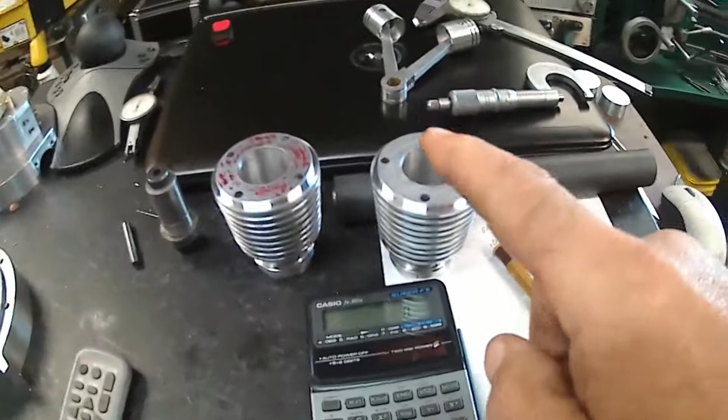So anyway, I'm going to go to the surface plate here. I went ahead and measured the bores, and they're pretty close to the same, both of them. 1 inch and 11 thou, about 11 and a half. So I'm just going to go with 11 thou, 1 inch and 11 thou.

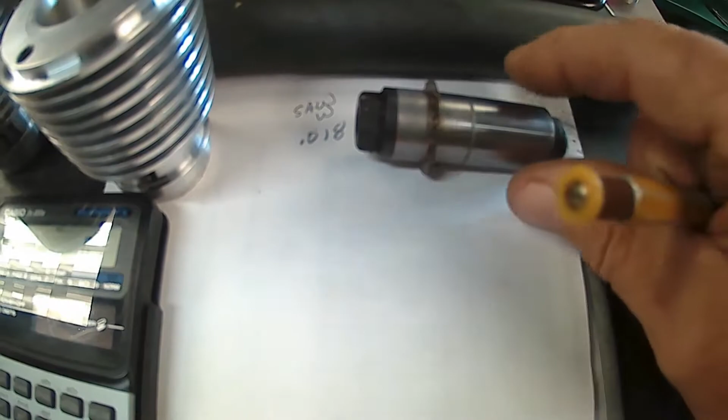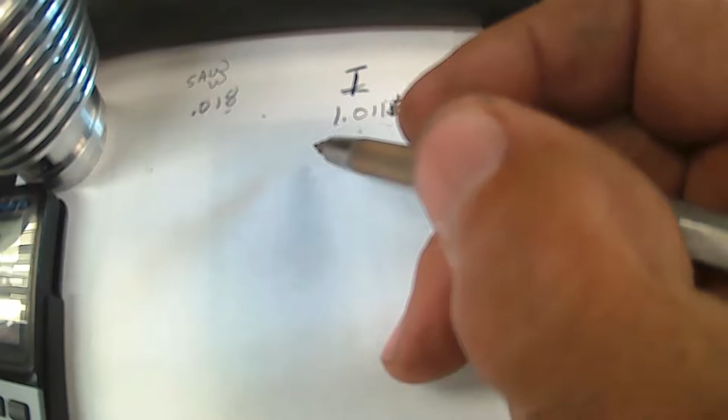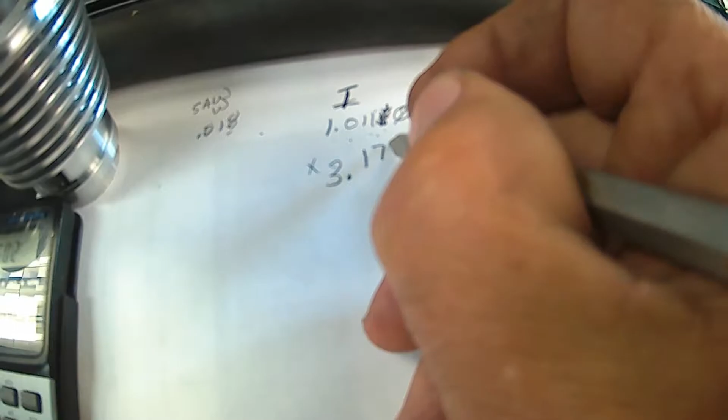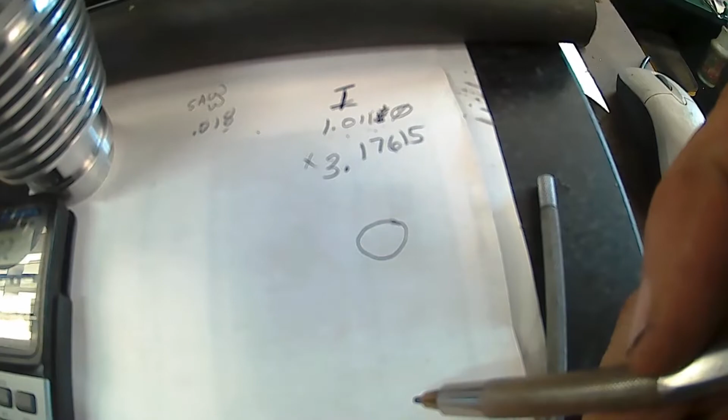My slitting saw width is 18 thousandths, that's 18 thou thick. So what I need to do is take this number, the ID of the cylinder, times pi. So we'll take 1 inch, 11 thousandths, times pi equals 3.17615, and that's as far as I'm going to carry it out. So that's the length of the circumference around that diameter.

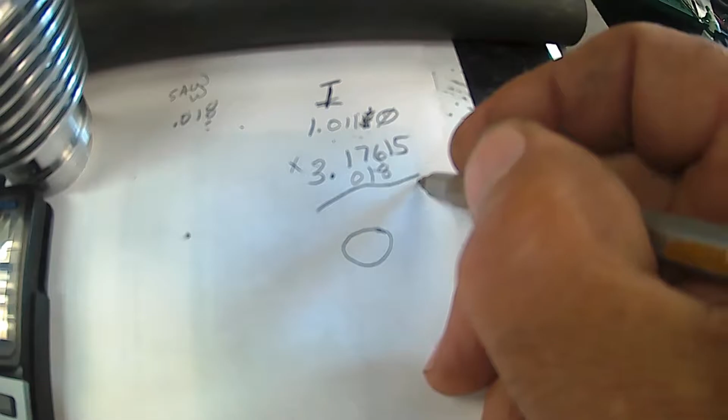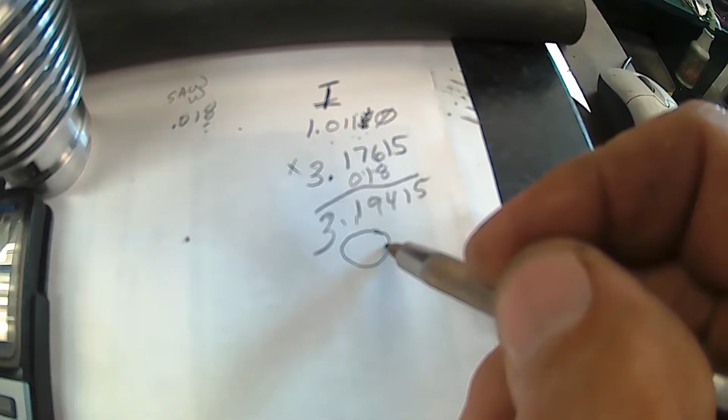Now I want to add 18 thousandths because I'm going to cut that with a slitting saw. So I add to this length 18 thousandths. I get 3.19415. So now my circumference with that 18 thou added to it is that number right there.

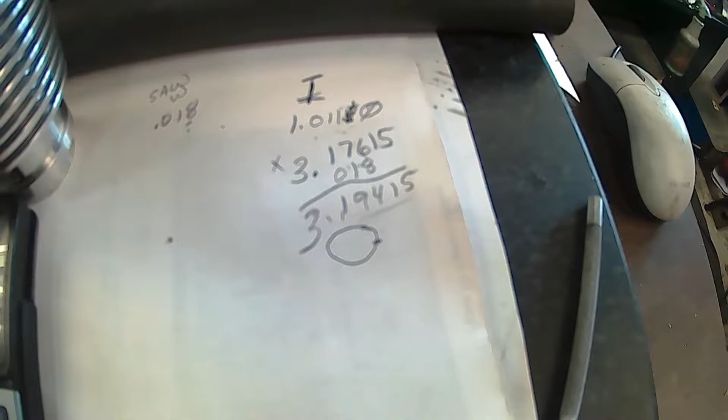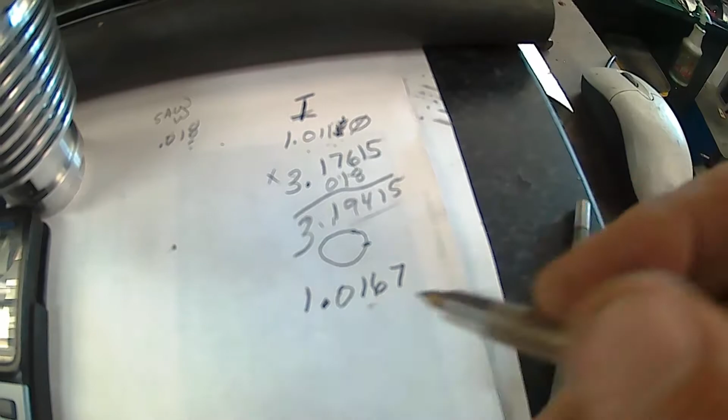So I take that number, 3.19415, divided by pi equals, this is the diameter I want to go for, 1 inch, 16.7. So that's the OD of what we want for our ring. This is the OD diameter.

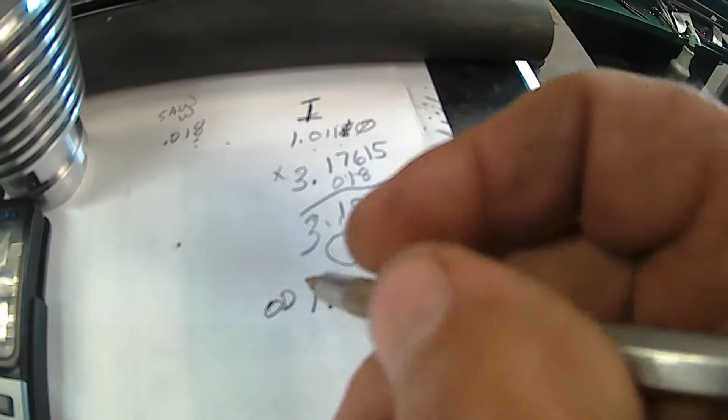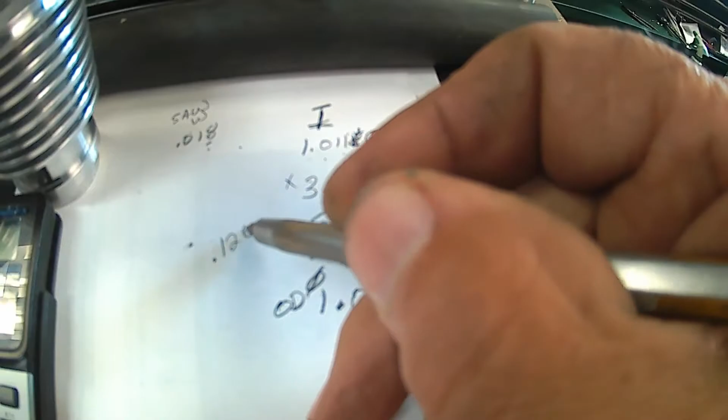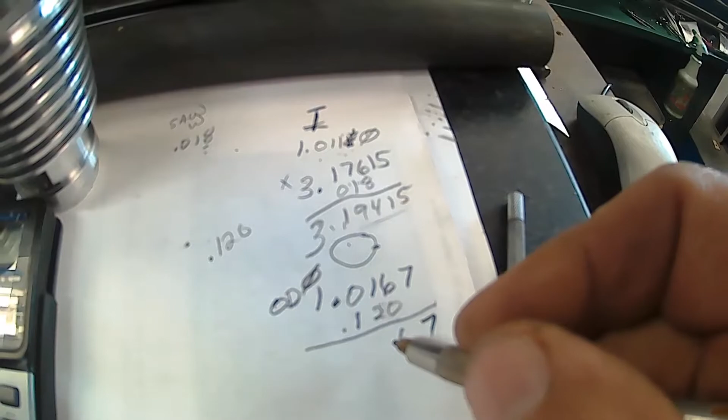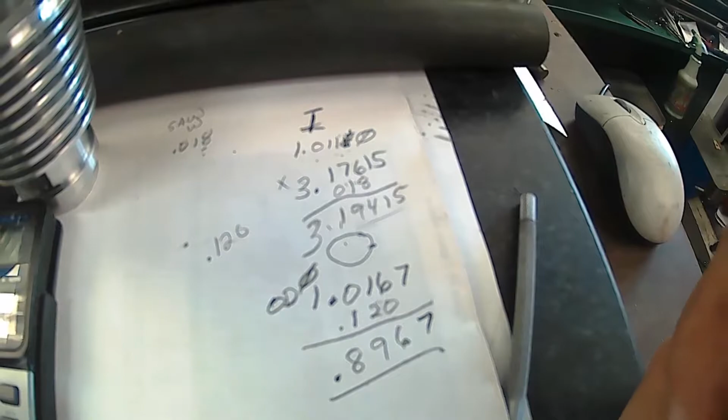Now for the inside diameter, I want to have about a 60 thou wide ring, so basically that's 120. All you need to do is subtract your ring width from that. So that is what we want to shoot for, 896 thousandths. Did that right? Yep. So this is the ID.

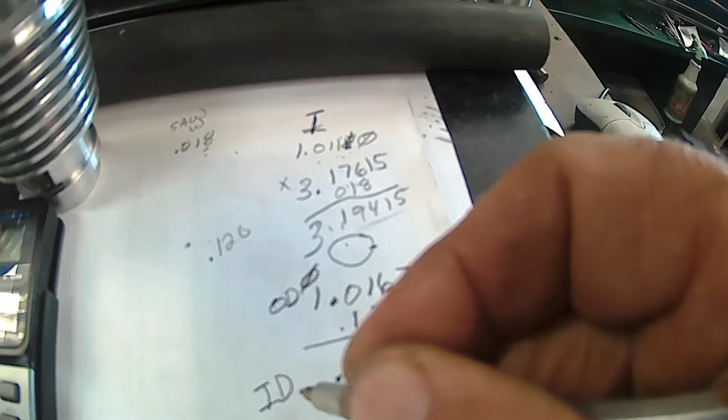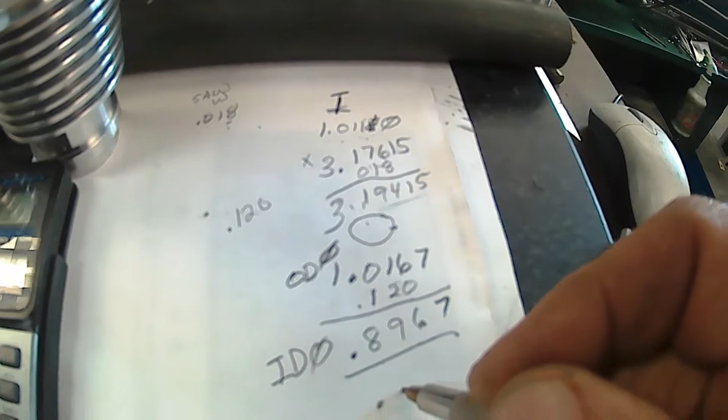And then the thickness of the rings, the finished thickness is going to be 0.60, actually 0.60 pushing 0.61. That'll give me about 1.5 thou of clearance on the side. So that'd be the width. So those are the numbers I want to go to.

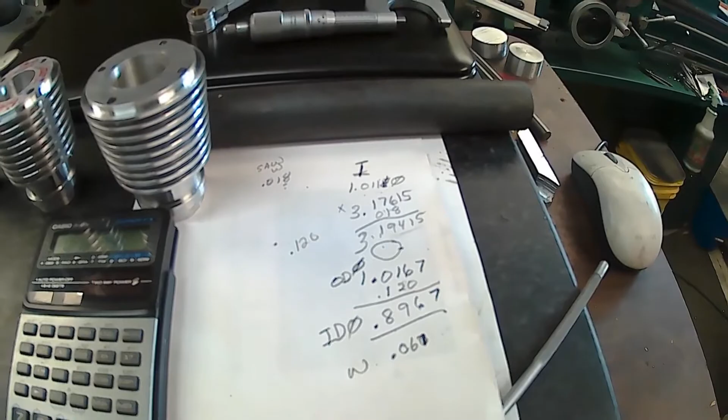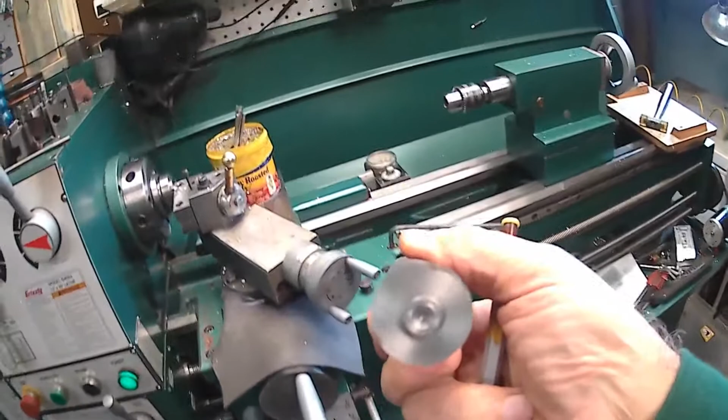So I'm going to go over the lathe and put the 3-jaw on. I've got the cast iron right here, this is nodular iron, cast iron. What it is, the grains are spherical instead of flakes, and it's a little tougher material. I'm not sure what it's called, but the difference between the two is one is flakes, the granules are flaky, and the other is nodular, more spherical, more round, the granules. But anyway, I ordered cast iron material special for rings, I think 3 or 4 different sizes that I have. But anyway, it won't fit in any collets that I have, so I got to put a 3-jaw on.

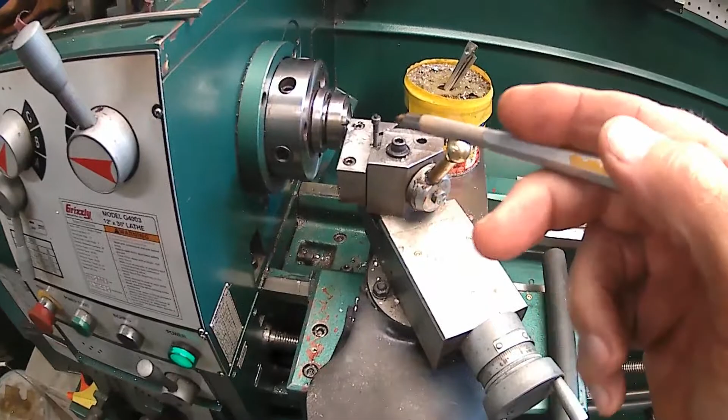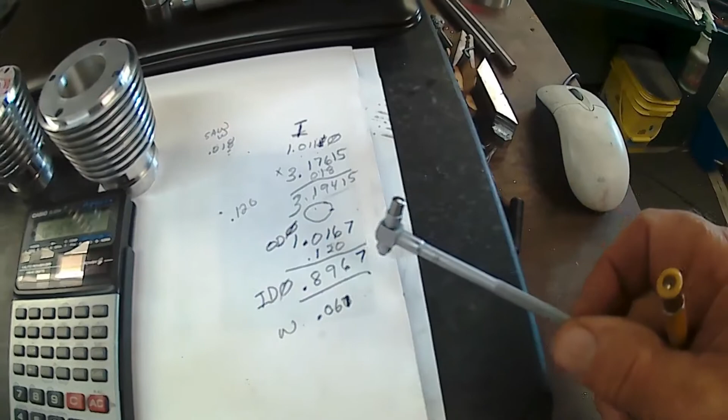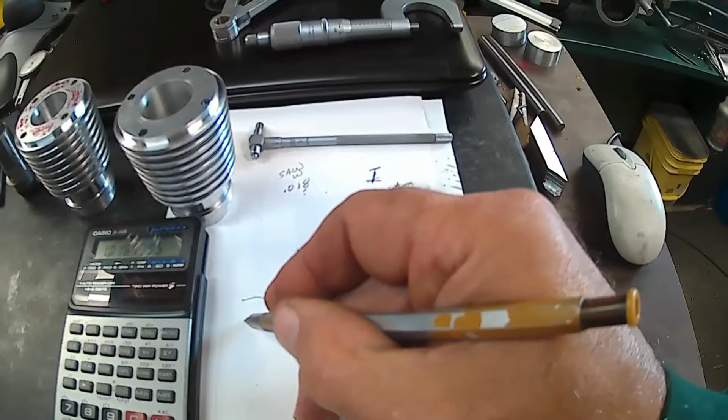So I'm going to go ahead and put the 3-jaw on and start turning up those diameters we just figured out here. I'm going to turn the OD, turn the ID, and then I'm going to try facing them off at that width, try to hit that width. And once I get the rings turned, basically all it's going to be doing is basic turning. Once I get them turned, we'll go over to the mill and take a vise, clamp them in the vise like that, and then we'll go through with the slitting saw and cut them.

I know a lot of people just break them. You wouldn't have to figure these numbers out then, but I've done it this way so many times and it's worked flawlessly for me every time. So I'm just going to continue doing it that way.

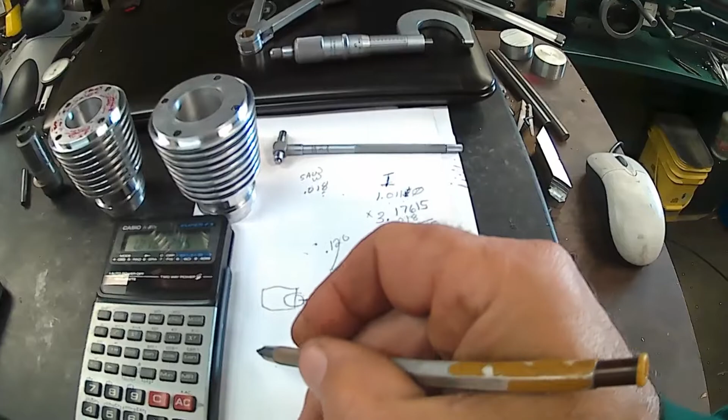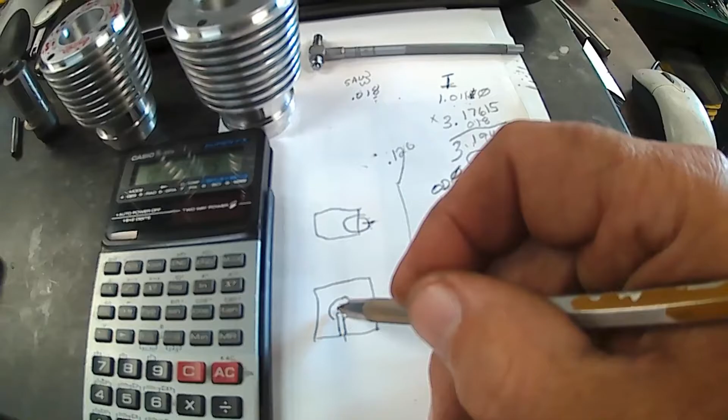And as far as heat treating, what I do is I take a flat plate or piece of sheet metal, tin, whatever, and I'll put the ring up against it with probably about a 120 thickness, expanding the ring apart. And that's standing up. And then I take and dim the lights because that helps.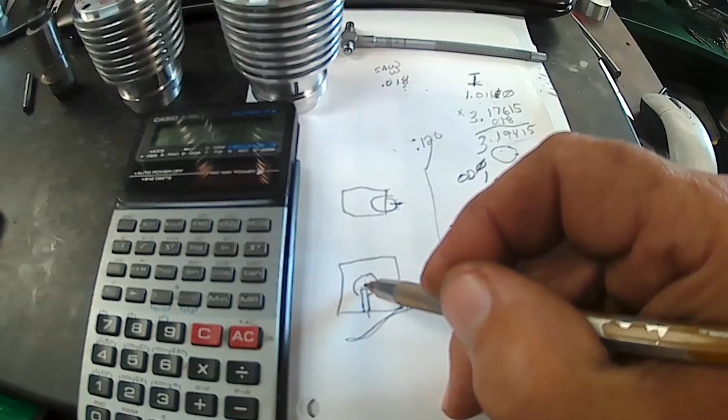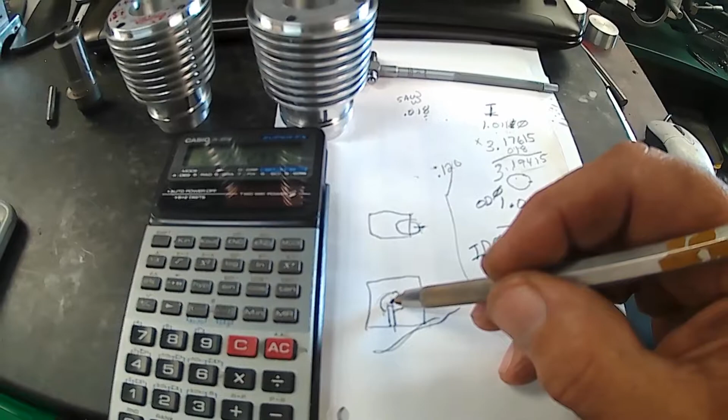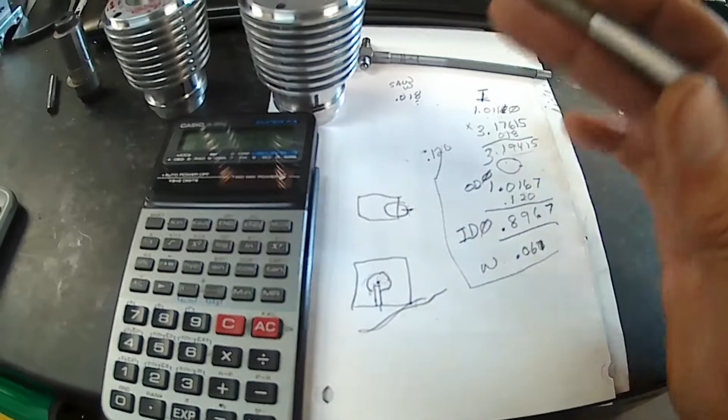And I get a propane torch and I try to aim for the middle with the torch, and I start a distance out, and then I come in and get closer, and that pushes the flame out. And once this starts to glow, if you see it's getting hotter on one side or the other, just move away from it. And once it gets like a cherry red, I just take the torch away and let it sit there and cool. Cool slow. And once it's cooled slow, you'll see there's no more grip on that, the gap is widened out now.

And then after that, we'll have to put them in the cylinder and size the gap. So I'm going to go ahead and turn them up. So when I get them turned up and parted off, I'll be back.

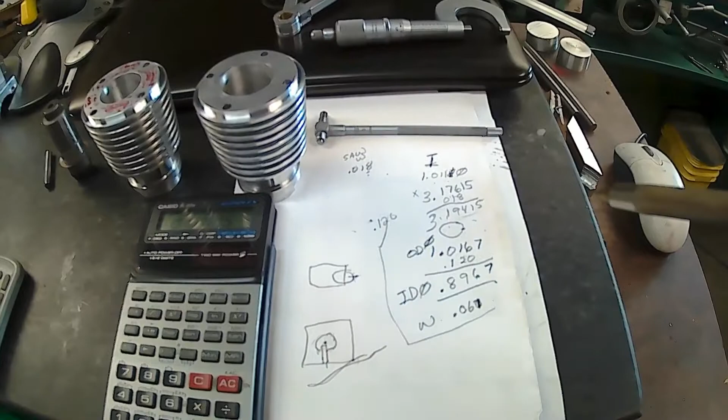Okay, I got the rings cut out and turned the OD, turned the ID, and then parted them off. I parted them off just a little bit wider than I wanted, so that I could come over and break the edges.

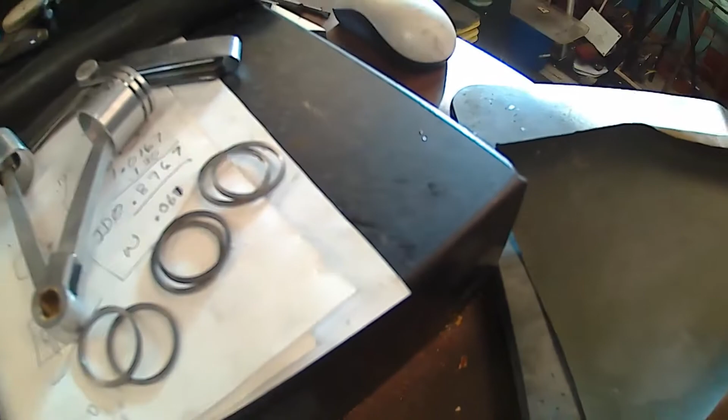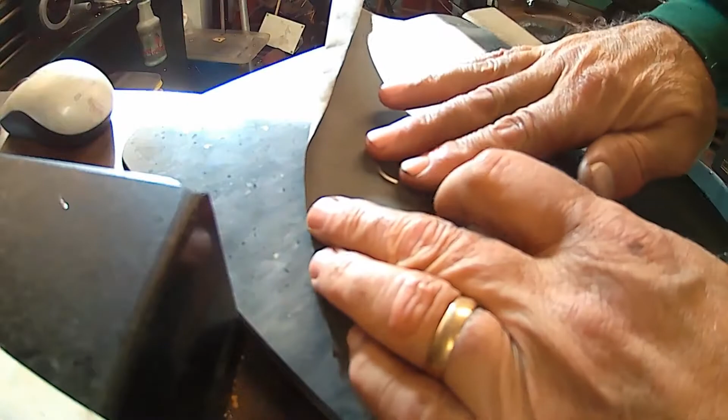I've got some wet dry paper, 600 grit is what it is. What I'm going to do is set it down here, set your camera down here, and just go on each side to clean it up.

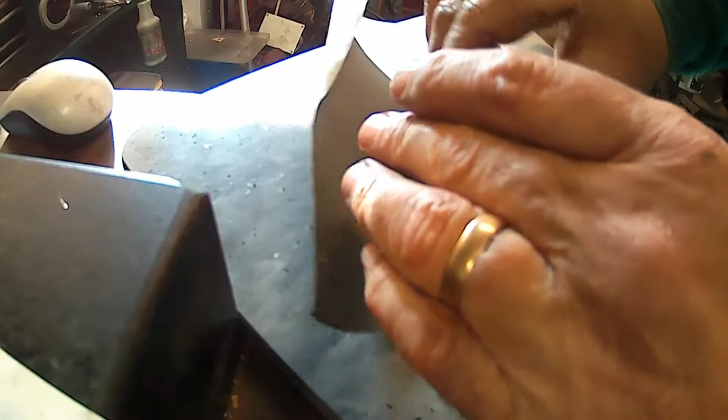That looks good. It doesn't take much. And then check - oh yeah, it fits in there nice now. It was a little tight to start with.

But I'm going to go through all of them and do the same thing. You can see when they clean up all the way around, if you look at it, they get nice and shiny.

I say it don't take much. That one just about. There we go. Anyway, I'm going to go ahead and do all of them that way.

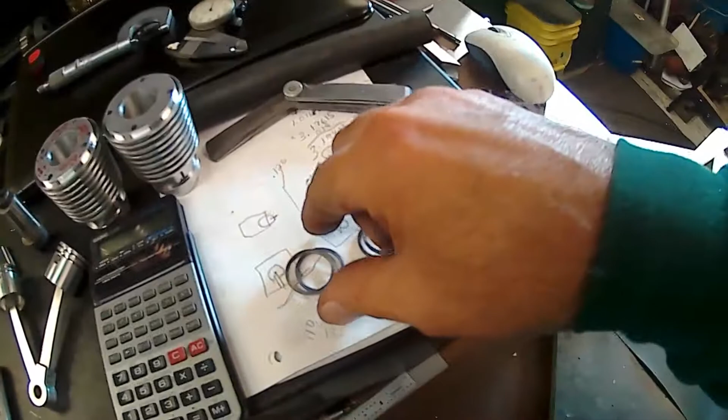I ended up with 2, 4 - that's one set - and 2, and almost another set. One shy of another set, but that's because I just finished out what I had turned. So, if I don't break any, hopefully knock on wood, I'll have 3 extras here.

What I'll do is I won't heat treat them, I'll just put a tape on them with what diameter cylinder they were for, because I could actually use this on even a smaller cylinder down to a 1-inch and probably get by with it. So I could use them for another motor or something. But if not, I'll hang on to them.

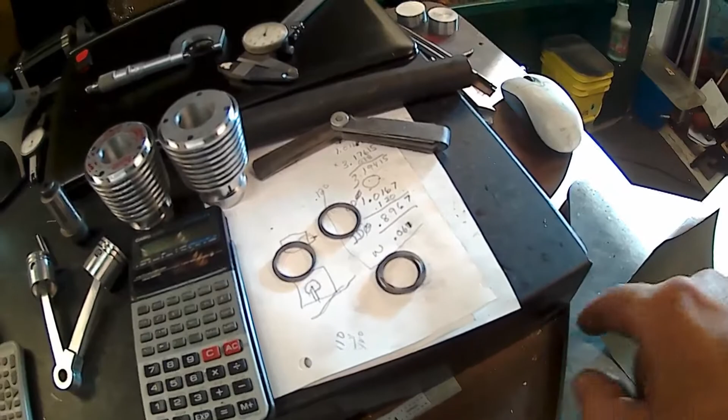But anyway, I'm going to go and finish doing that on the paper, and then we're going to go over and I'm going to put a little slitting saw in the spindle in the mill, and we're going to run through and slit these.

Like I say, it's nothing spectacular. I just clamp them in the vise like that. Just beep, beep, run through.

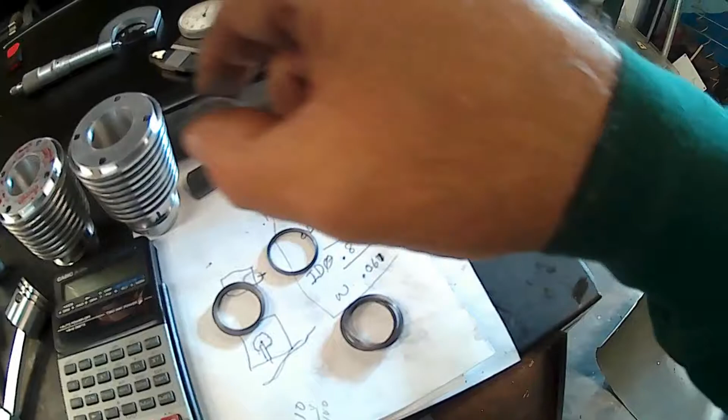It doesn't - theoretically you'd like to have the slit on center line, but if it's off, it really doesn't matter a whole lot. You're going to come back and put the ring in and then gap the ring with a file anyway. So I don't know - I just kind of eyeball it to center, and I don't dial them in or anything. I just eyeball it to about approximate center and run it through.

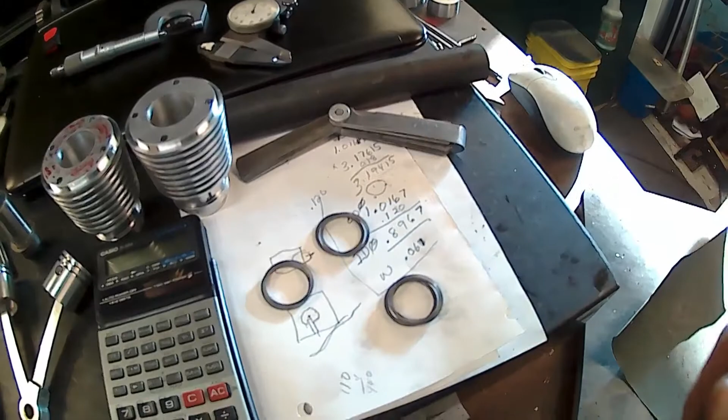So anyway, until then, I'm going to go ahead with the paper and clean them up, and then we'll move over to the mill the next time I start videoing again. Catch you later.

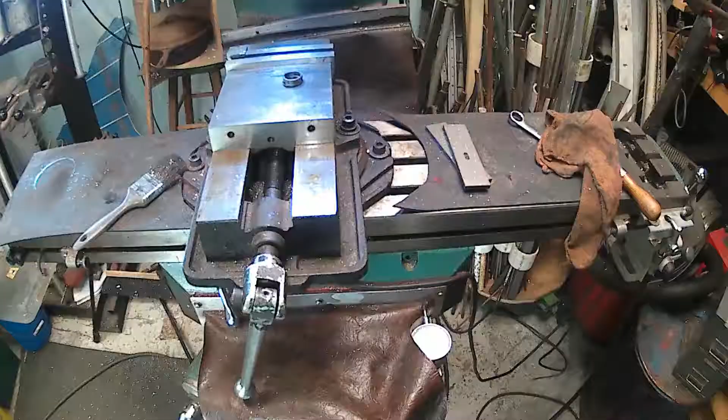Okay, I'm going over to the mill here, and we're going to clamp them in the vise. So what I'm going to do is...

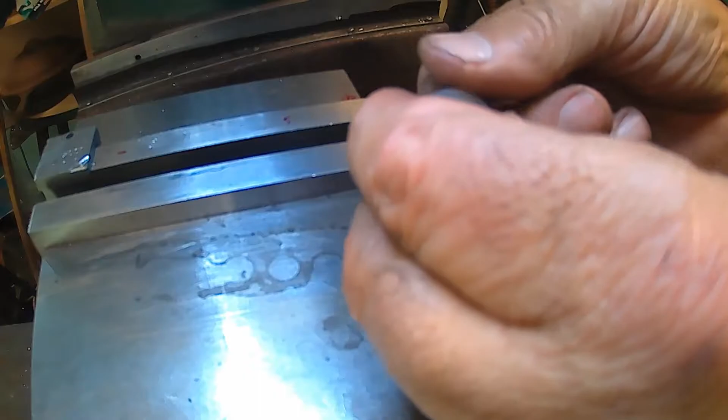Take a small drill, just take a small drill. This is what I do when I have a whole bunch of them - put them all on the small drill, put them in the side in the vise. I got them all on a small drill, and I just kind of hold the drill parallel up with the table, and then push and hold them up against the drill, then tighten it up. Now they're all pretty close to the same height.

Like I say, I don't worry about them getting cut right on center line. Now we can move over here and put the cutter in.

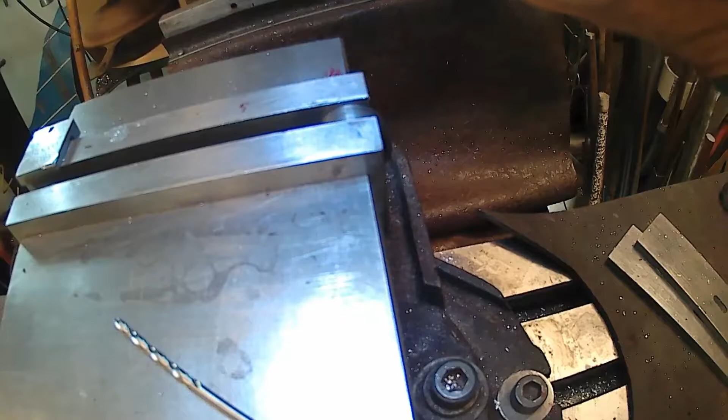I believe it's a 3/4 shank. Take the collet out and get the right collet. Check to make sure. Yep, that in... that in. Snug it up.

And then bring it down. I'll crank the table up, crank the knee up. I'm going to move you to the magnet and see if I can turn you on the side.

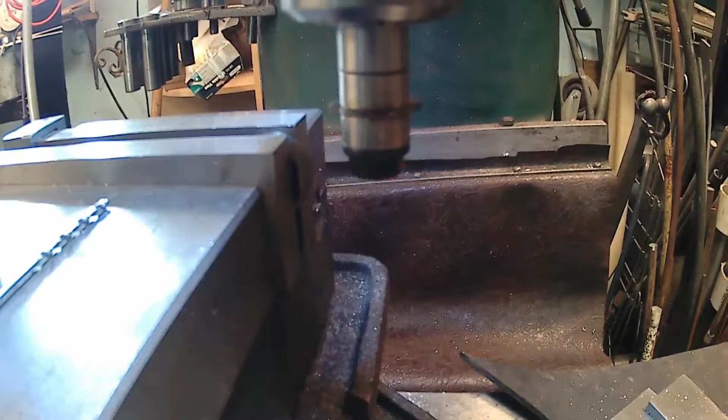Hopefully you can see. Now I'm just going to crank this up, and I'm just going to eyeball it to center. I know it's not going to be perfectly on center, but that's fine.

I might have to get the other light, try to get the light behind the camera though, if you can see that or not. This light here, when the spindle's down like that, it's hard to see. So I'll crank it up a little more. That looks like it's pretty close to center right there.

All right, here we go. I don't take it all at once, I just kind of ease my way through it.

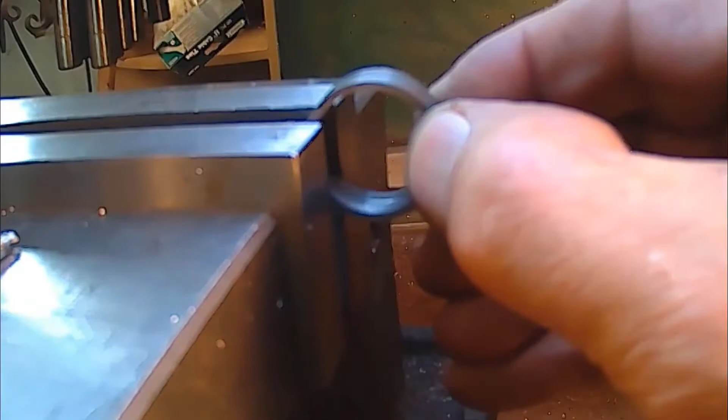I think I'm through it. Make sure, just take the last little bit there. Okay, that was easy enough. So now they're all split.

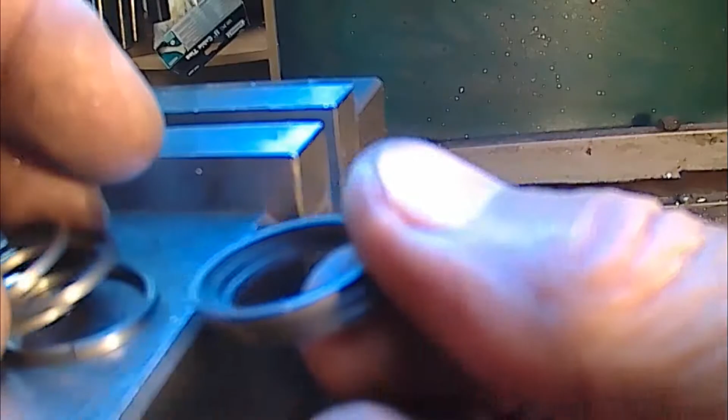Now we'll do the heat treating. I'm going to set up an area on my workbench over there and try to set the camera up behind me or over my shoulder, and we will heat treat these.

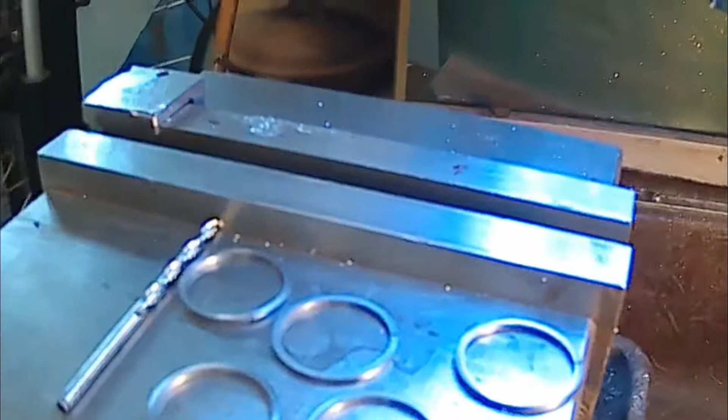It's not that hard to do. I've got a piece - I used to have a little block, not sure if I hung on to that, about 190, 187, 190 wide. I don't have it anymore, so I'll have to make myself a little block to fit in there. What I'll do is open them up and put that block in between them, and then we'll heat treat them. So as I get the block made up and the place set up, we'll be back.

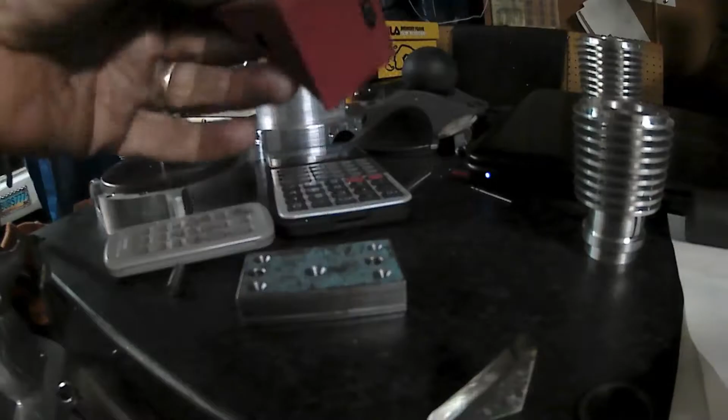Okay, we're going to attempt to heat treat them. It's a little dim in here because I turned the lights out so that this would show up. I've got just a piece of sheet metal here, just an old piece of corner stiffener.

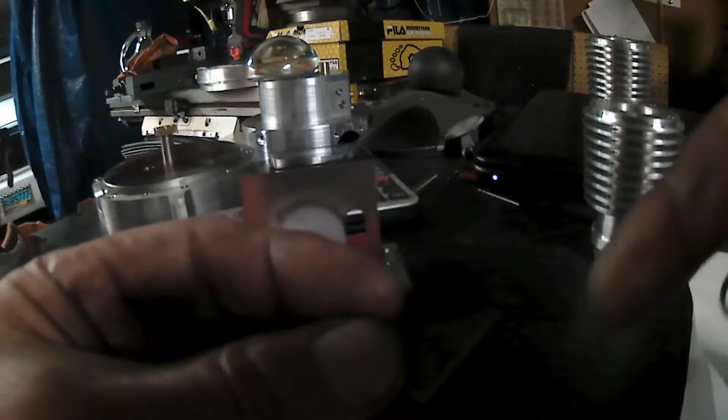I took and made a block, cut a little notch in it. Actually, I went 150 thousandths wide, and it's got a little ramp on it that I can push the ring on.

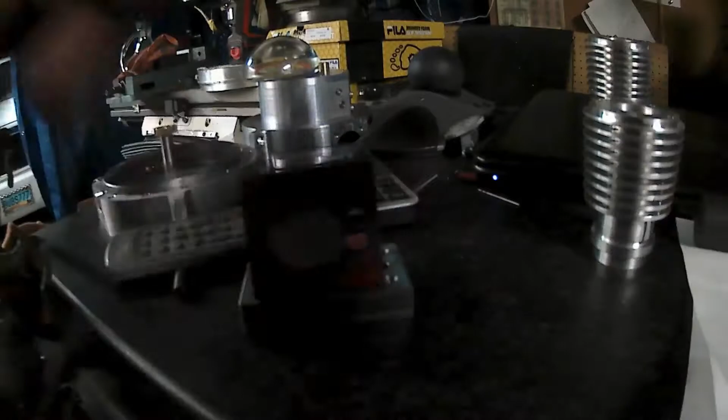Get the ring on here, and the ring is getting held apart, and I'm just laying it on the surface plate here to get it all so it's straight. Okay, I got it on there.

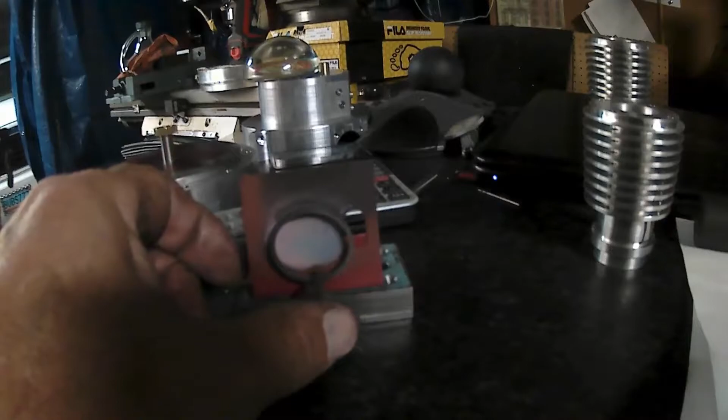Slide it down and bring it up and set it in front of that plate. You really don't want it up against it. You want it away, just a little ways away from it, maybe 1/8 of an inch away in front of the plate. That plate is going to reflect the heat back.

Okay, and I have a little propane torch here that I usually use for this. It's just a stand type that I made, but you can use just a regular old propane torch. You just come in here and aim for the center and slowly heat it.

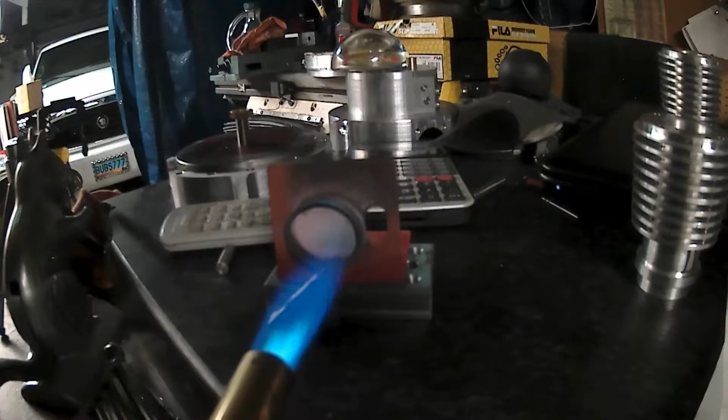If anything, you stay to the bottom to where it's split, and then you just slowly move it closer, a little closer, and you'll see it's starting to glow up here and down there.

Now when it gets nice and cherry red all the way around, all except for down there, you take the flame away, turn off my gas, and let that sit there and cool, let that cool a little bit.

I'm going to go and turn the lights on, the rest of the lights, so I can see. It doesn't take a whole lot of time for it to cool. I can still feel it's warm. But you don't want to quench it, you don't want to blow air on it. Just let it cool slow.

It's still hot. We'll just sit here and wait a few minutes or seconds or whatever. I'll cut some of this away.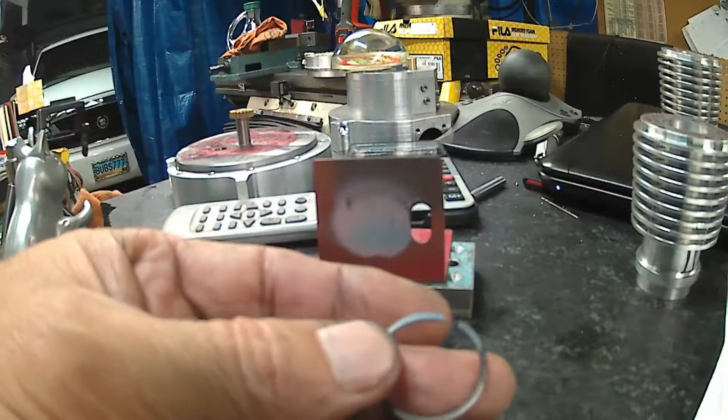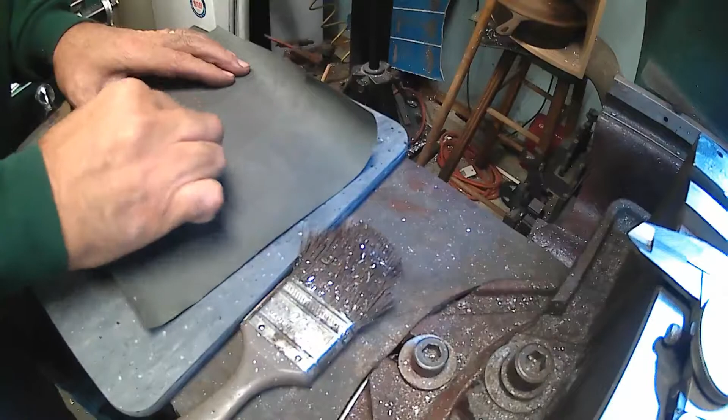Now what I do is I go over and hit it with the sandpaper one more time, this 600 grit paper. I just put it down and kind of go around, give it a half turn, a quarter turn, and then go around. I want it to kind of clean up all the way around. You can see where it's shiny and where it's oxidized.

That's pretty close, and then we'll do the other side. Okay, that looks pretty good.

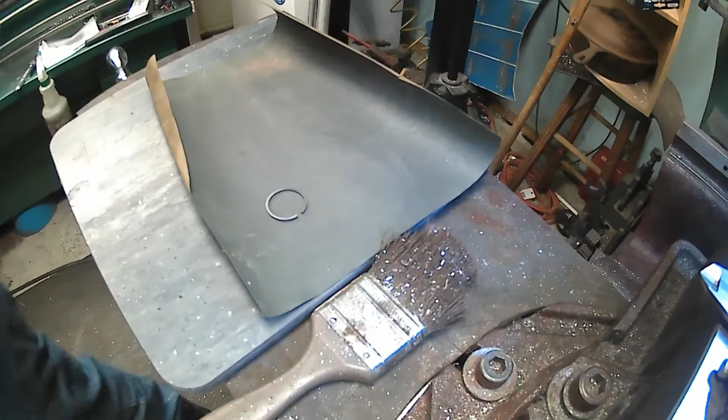Now we'll take and get the cylinder over here. What we want to do is put it in the cylinder. Before I do that though, I'm going to hit it with a file a little bit.

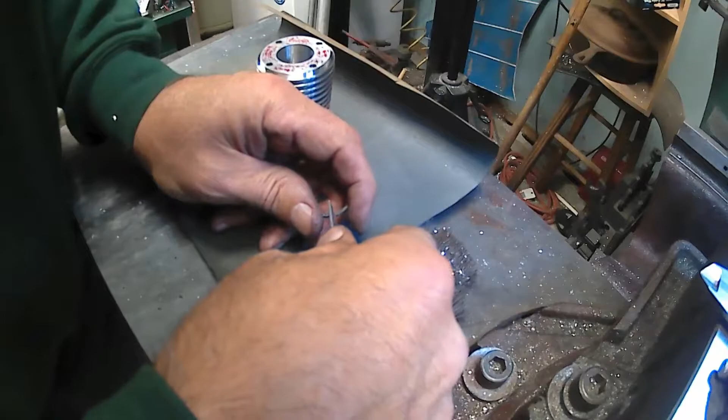I've been lucky so far. I've hit it with a file, a few strokes, and got the gap set right away. But you just kind of push it together on the file like that, work your file, and what I'm shooting for is anywhere from a 4 to 6 thousandths gap.

I don't want to go any less than 4, and I didn't want to go any more than 6. All right, so I hit it with the file a few times. Now I'm going to go ahead and push it into the cylinder.

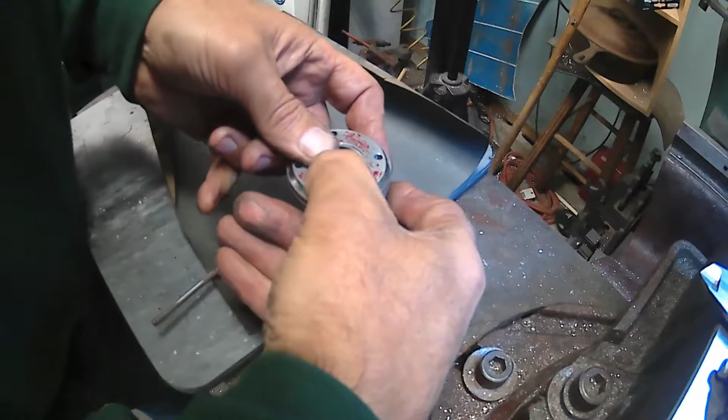Okay, so once you get it in the cylinder like that, take the piston and just push it down a little bit. I thought I had it in all the way. There we go.

Just push it down a ways, and then what I do is go from the back side and push it back up so that it's sitting in there nice and true and square.

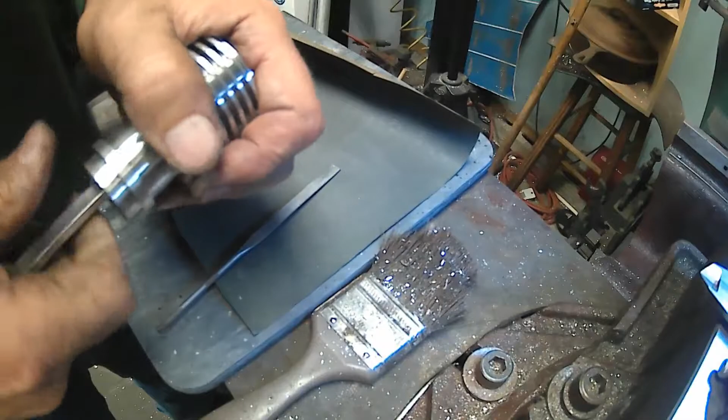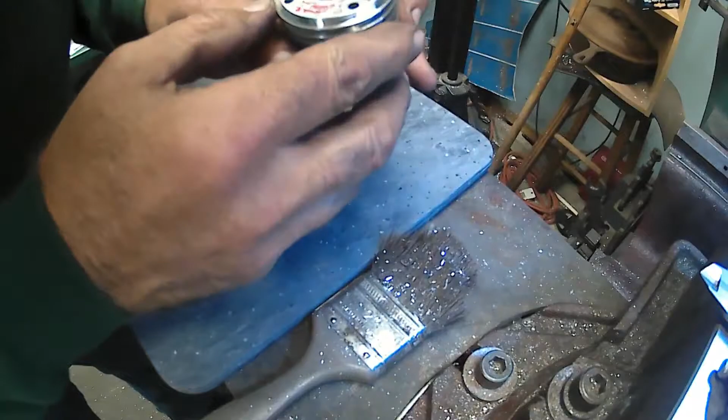I just set it down and shoved it back down, and now it's flush with the top. And we'll measure that gap of the ring. I have a 4 thou feeler gauge here.

It's a little tight, so I'm going to take a couple more strokes off of that. So I'll just take and push it out of there.

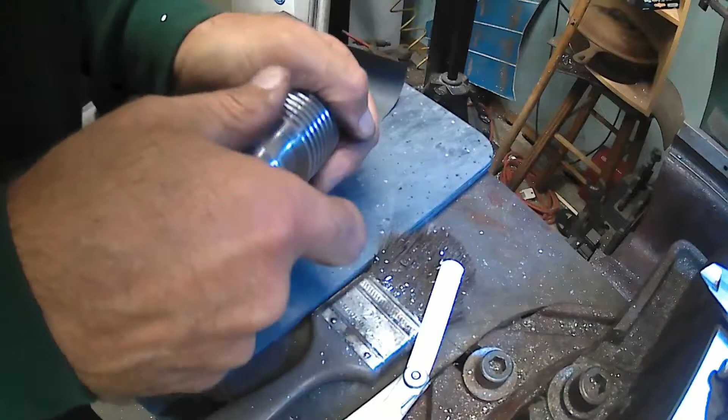Trying not to drop anything on the floor. I got the dropsies today. I've been dropping stuff. So, all right.

Well, I'm going to just give it - it usually doesn't take too much, and that should be good enough.

Where did I lay the cylinder? Oh, right here. And now we'll go back to the cylinder and do the same thing as we just did. Put it in there.

Sometimes it can be a bugger to get started. They want to flip sideways, and then you end up breaking them. Like this one. Come on.

Why are you being such a bugger? Alright, I'll flip it over then. It's being a pain. I just had you in there. There we go, alright.

Okay, and just push it down just a little bit. Then tip it upside down, put the piston in there, shove it all the way down. Now it's to the top again, and check the gap again.

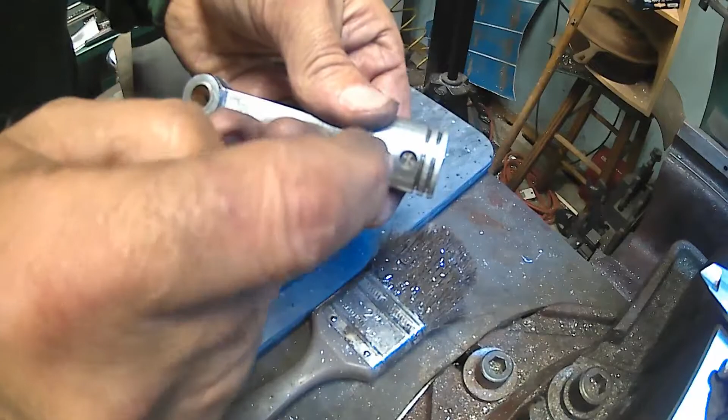Now the fun part, putting it on the piston. What I've been doing is I start with the bottom one first. I take the piston off of the rod, start with the bottom one, slide it up, pop that on very carefully, expand it and slide it up there. Then I go ahead and do the top one and put it on.

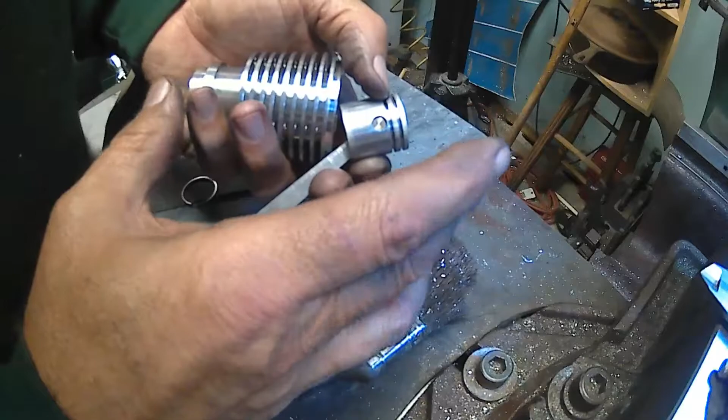When I go to get it into the cylinder, I put it in from the top side and push it down up against the first ring. What I do is I take a can twist clamp and just put really light pressure on it, then go around and work it in with a scribe. It'll snap in, slide it down to the second one, do the same thing, and you're set to go.

I have the other one already in position, in there already. The rings are in, and they'll naturally have to be run in. They're a little snug, but that's okay, they're gonna seat and they'll be just fine.

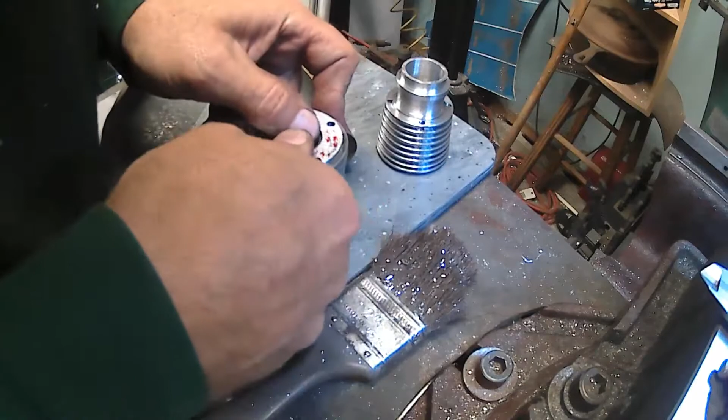Something else I should mention, just in case your heat treat goes awry. If you don't heat it up evenly, you can end up with an egg shape or out-of-round ring, and then when you go to put it in here to set your gap, you'll notice it right away.

Put that in there and slide it down, then take it and hold it up to the light and just look around. You'll see it right away around the edges. And if it's out of round... this one here, perfect. Not to brag or anything, but it's perfect.

So you have to really be off with the heat, heating one side up red hot before you heat the rest of it, for it to go bad. I've never really had one go egg shape, they've always come out pretty decent.

Try to aim for the center, and if anything, stay low toward the gap when you put the flame in there, because the bottom where the gap is does not get as red anyway. So anyway, that's how I make my rings, and I've had good luck doing it that way.

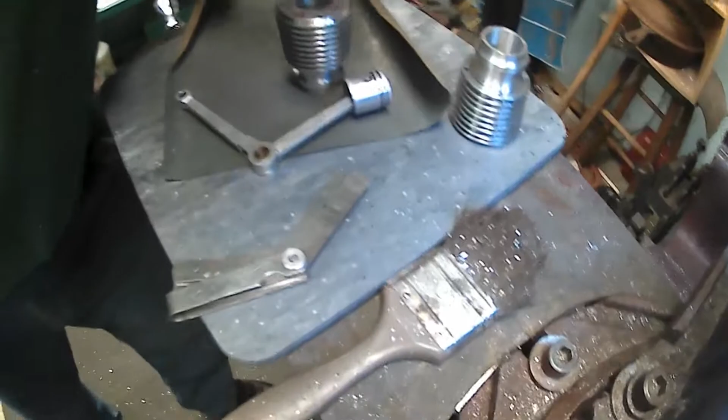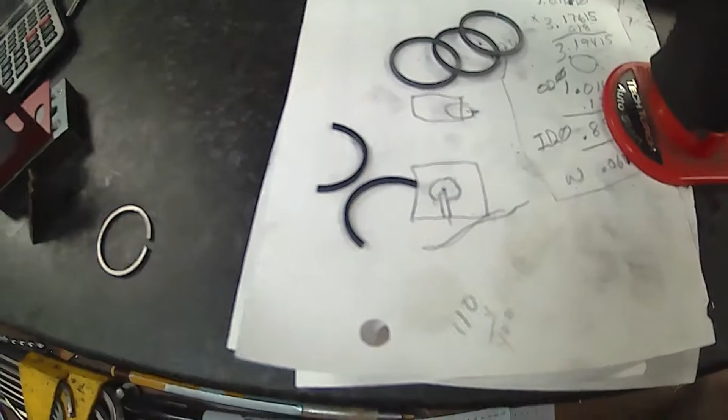I think that's going to be it for ring making. I did break one when I was doing that first piston. I got impatient and broke one. So I still have three to go, and I got 2 spares yet, so I have 1 piston's worth.

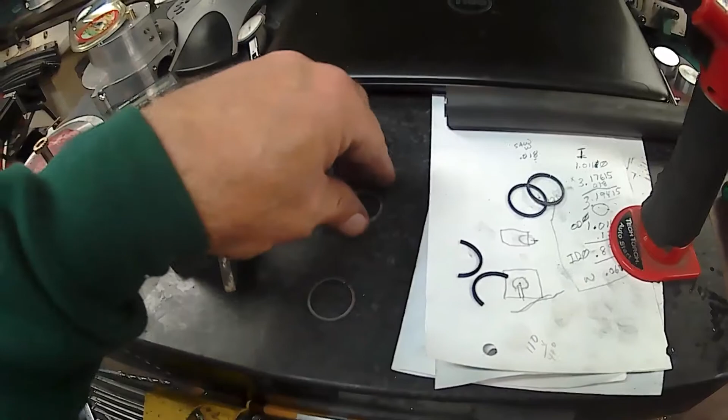So I'll heat treat another one. Hopefully I'll get this one on fine. But yeah, you got to be careful when you're putting them on. They're tough getting them on sometimes, but if you're just really patient and take it slow, sometimes a little oil will help too. I put a little dab of oil on, and that'll help too.

But anyway, what am I going to do next? I have the rings done. I'll be probably working back on the crank and rod journal, and get the crank and rod done, or crank and flywheel done.

And then I can put everything on and get some bearings and try to balance that. I'd like to get it close to balanced as I can. If anything, heavy on the opposite side of the piston and rings, opposite the rod journal. I'd rather have that side a little heavier.

I've found sometimes that tends to make it run a little bit smoother. Sometimes, not all the time. But anyway,